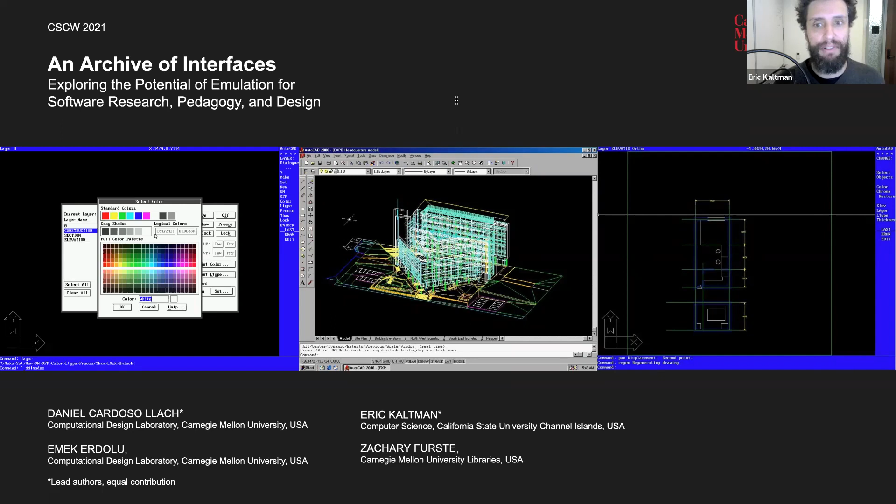The study of historical software poses unique research challenges, as these systems depend on networks of hardware and software that might be technically difficult or in some cases impossible to reproduce or reconstruct. Our paper documents how distributed emulation networks might help address these challenges and support software research, pedagogy, and design.

Emulation is a type of virtualization that recreates the conditions for a piece of legacy software to operate on a modern system. We argue that it has advantages over other methods for investigating historical and sociotechnical aspects of software and software-based practices, through a case study of a pedagogical experience incorporating emulations into a graduate course on computer-aided design.

We show that emulations allow for close user-centered analyses of software systems that highlight both their historical evolution and core interaction concepts, while also revealing how they conditioned historical forms of work. We further show how emulation can be a resource in the speculative development of computational design systems.

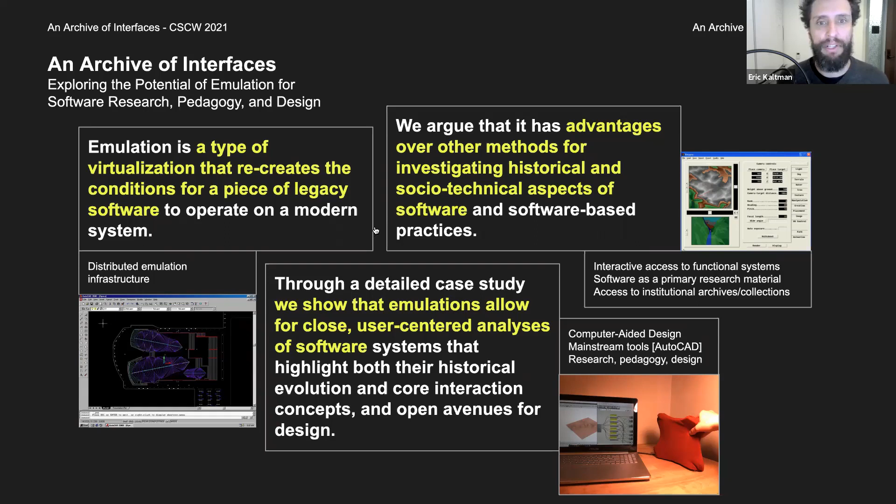Work leveraging historical and sociotechnical methods is relatively sparse in CSCW. However, there are notable exceptions. These include, for example, efforts to trace the evolution of computer interfaces from their 1950s origins in academic and industrial labs to realized end-user products in contemporary settings, as well as the historical development of interaction techniques.

Other efforts have focused on articulating how technologies are fundamentally informed by past systems and engaged extensively with documentary and oral sources to understand their context, in order to draw insight or open up pathways for design.

A related but distinct strand of research informed by science and technology studies has tried to situate software in historical and social contexts, in order to highlight its shaping of bureaucracies, professional practices, and public understandings, or to clarify the relationship between information infrastructures and the knowledge practices that they support, or to critically trace their ideological commitments and their linkages to emerging forms of pedagogy, activism, and labor.

These examples have mostly relied on the conventional tools of historical research: oral, archival, and other documentary sources. These are, of course, invaluable to illuminate technology's contexts, but are not always well suited to examine their specific dispositions and modes of operation.

A recent strand of research at the intersection of CSCW, computational design, HCI, STS, and archaeology explores an expanded methodological repertoire that engages with visual, material, and tactile aspects of historical technological artifacts, considering them as primary sources or research materials through reconstructions, restagings, or approximations of historical systems.

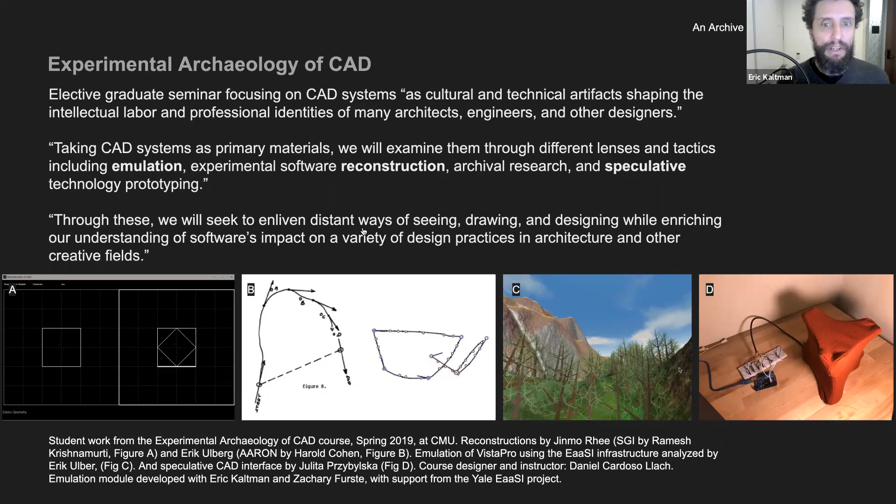The course tasked students with analyzing and interpreting the history of specific CAD systems through different methods: reconstruction, emulation, and speculation.

Prior to the emulation assignment, we provided a selection of historical CAD systems in the EaaSI framework obtained from the University Library and School of Architecture archives. Students were invited to research their CAD system's historical and sociotechnical contexts, as well as its visual and interactive qualities. Students had 2 weeks to familiarize themselves with the EaaSI interface and investigate their chosen CAD systems.

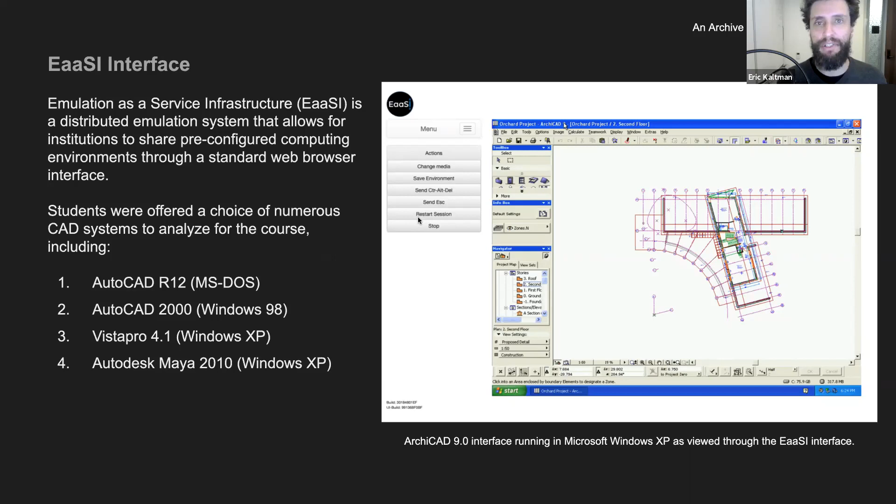As illustration, we'll quickly overview the analysis of different historical versions of AutoCAD conducted by two students in the class. Each of them had previous professional level experience with modern versions of the software.

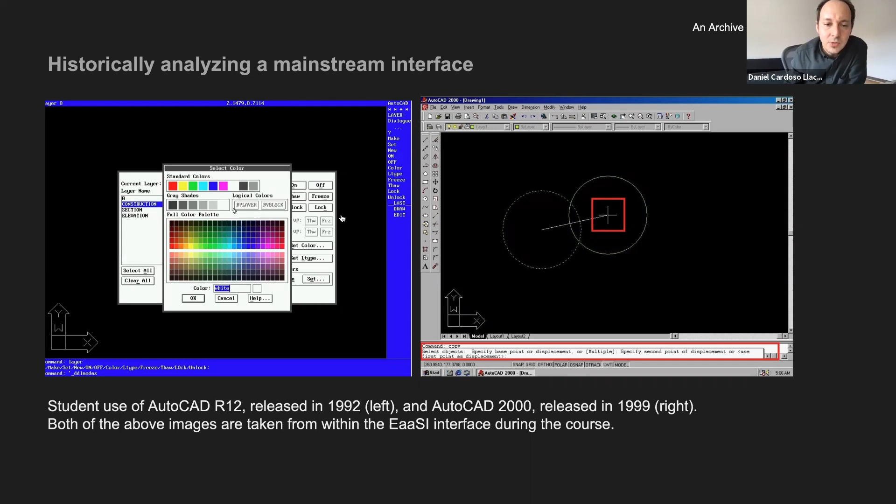One focused on the DOS-based AutoCAD R12 released in 1992, and the other looked into the Windows-based AutoCAD 2000 released in 1999. These were documented by the students as reflective written reports and were enriched by image captures from both their historical research and their use of emulations.

The first, Josie, set out to use AutoCAD R12 and compare it with the modern versions of the software, which he knew well from his past experience. Using R12 confronted him with what seemed to be a purer and more elemental version of the system.

To test it, he drew the floor plan of a simple house. He found that he had an unexpected dexterity with the old system.

Finding persistent traits across old and new versions of the software, he tentatively attributed them to either the company's 'conservatism' or to the existence of underlying design. We're terming this underlying design, revealed to Josie in his analysis, a software's core interaction concept.

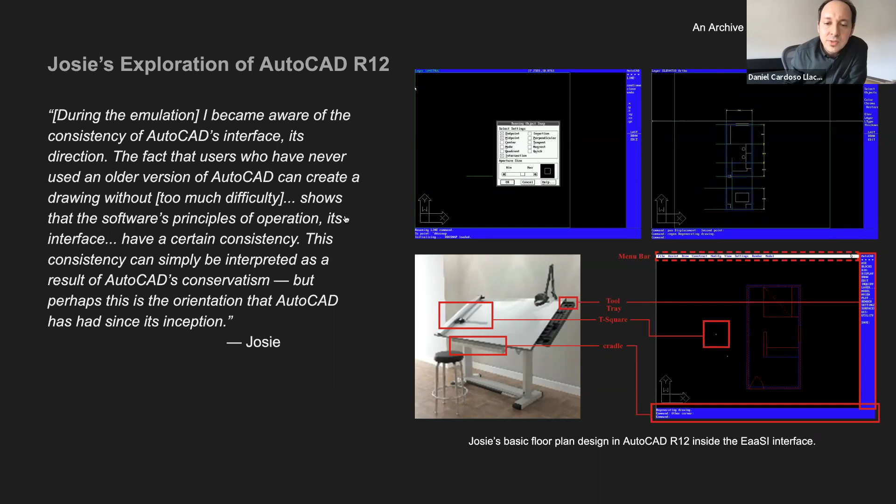He is familiar with the repetitive nature of drafting. His discovery led him to wonder about other kinds of inputs. Drawing from his analysis, he thought of a CAD system controlled more intuitively through a user's gaze and voice.

Building a prototype allowed him to analyze the potentials and challenges of these new ways of interaction and to realize that seeing is not drawing. In other words, that seeing and drawing are different and mutually supportive activities.

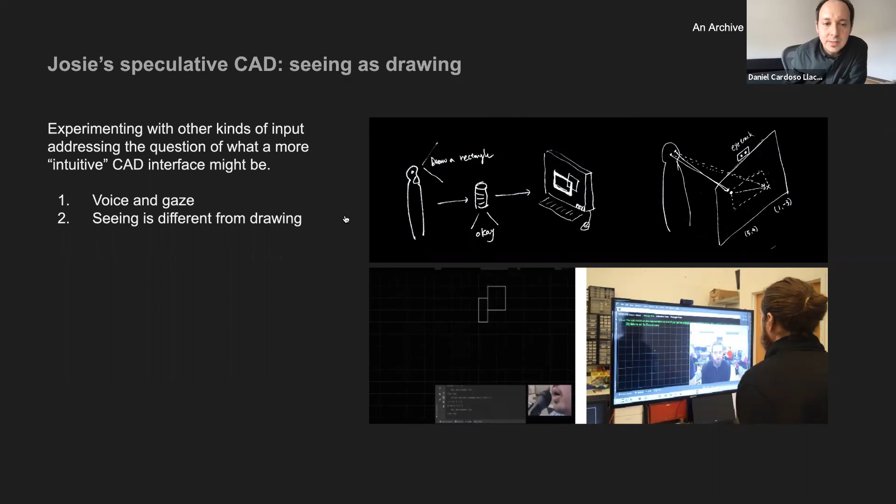For Jer, who like Josie was a professional architect before coming to grad school, AutoCAD 2000 seemed simple in comparison with the more recent versions. The interface was 'decluttered,' the number of icons was 'manageable,' and the barebones interface highlighted for him the functional skeleton of the software for file management operations, including saving and copying drawings, managing layers, as well as associated files.

He reflected on how some of these changes may have impacted issues such as the division of labor within the architectural and engineering workplaces. He drew comparisons between analog drawing practices and AutoCAD's functions.

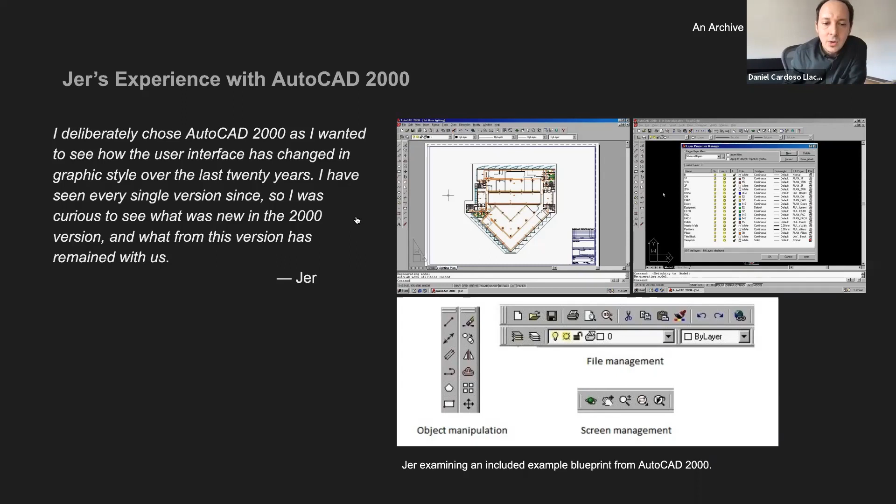This led him to consider the different bodily postures adopted by traditional and digital draftspeople. He started to wonder how standard input devices, keyboard and mouse, shape or constrain them. With this, he imagined a speculative device to experiment with other motions and physical qualities in design work.

His speculative interface comprised a tangible interface which replaced keyboard input for entering commands. With this, users could create different configurations of commands, mapping them into a different gestural and bodily vocabulary.

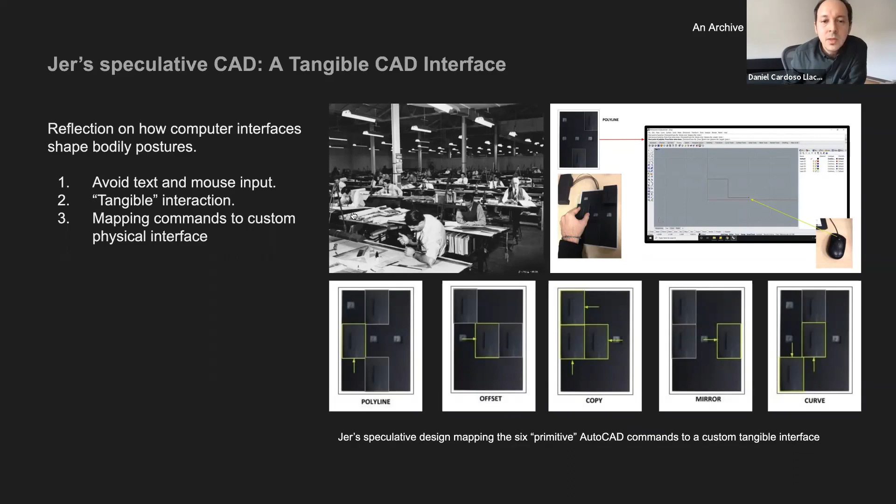This brief overview of our case study shows how emulations can be part of a pedagogical and research toolkit for examining historical and sociotechnical aspects of software and informing its conceptualization and design.

Emulation has the potential to enliven aspects of software research and learning with an expanded context that includes phenomenal engagements with interactive systems, their time-based operation, and their visual and operational qualities.

An additional contribution is to situate emulation within a landscape of historical and interpretive methods within CSCW and adjacent fields. By helping trace a software's evolution and distinctive visual and interactive qualities, the analyses of different emulated legacy systems presented here offered a glimpse of how studies of computer-supported cooperative work might benefit from close readings of historical mainstream software interfaces and how these readings might enrich other forms of analysis and design.